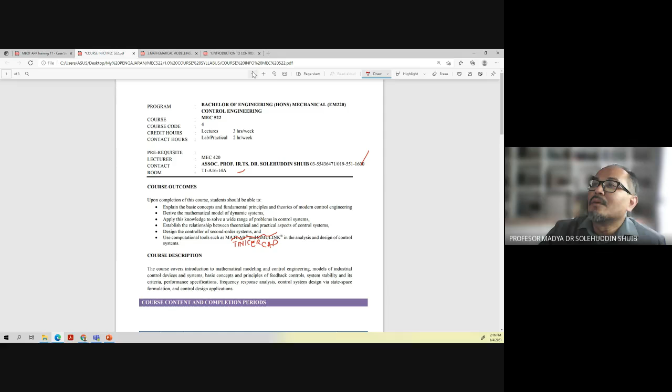As I mentioned last week, for this class we are going to explain the fundamental and basic concept of modern control engineering. You should be able to derive a mathematical model of a dynamic system, and then apply it to a wide range of problems in control systems. As for the practical aspect, which is for the lab, we're going to use a computational tool, Tinkercad, to do the analysis of the control system.

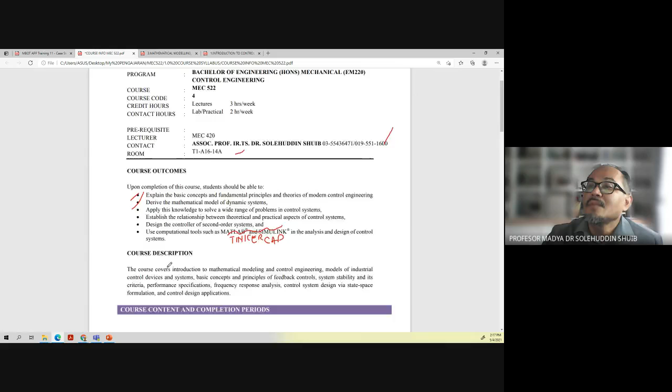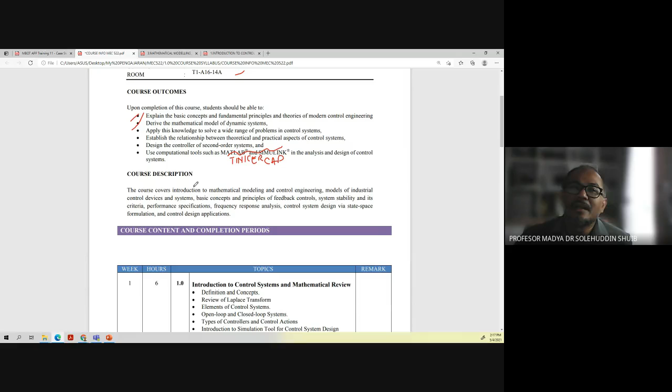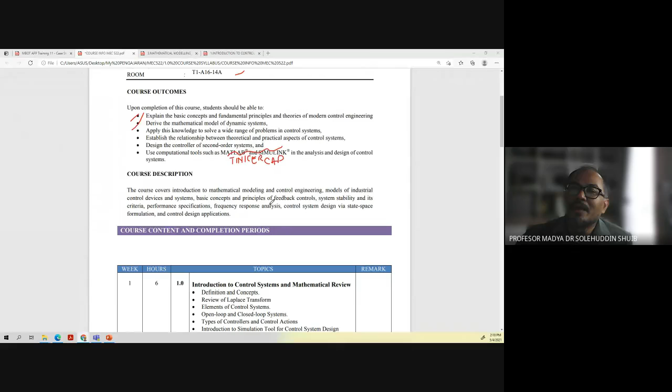For this class we are going to cover the following: introduction to mathematical modeling and control engineering, models of industrial control devices and systems. Then we will look at the basic concept and principle of feedback control, then system stability and what the criteria will be. Then we'll look at performance specification, frequency response analysis, and control design applications.

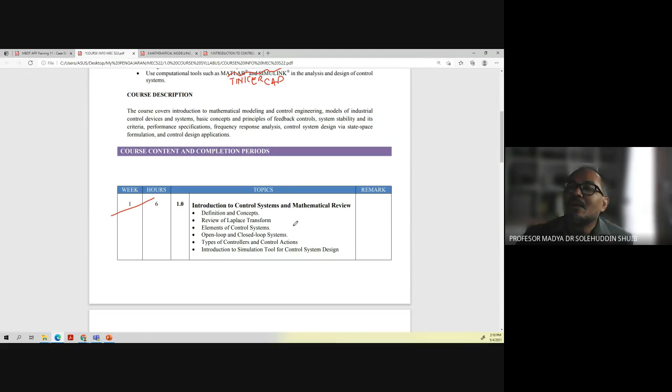So what we have done last week is a bit on the introduction and review of Laplace transform, what elements in control systems are about, open loop and closed loop systems, different types of controllers, and a bit on the introduction to simulation tools for control system design.

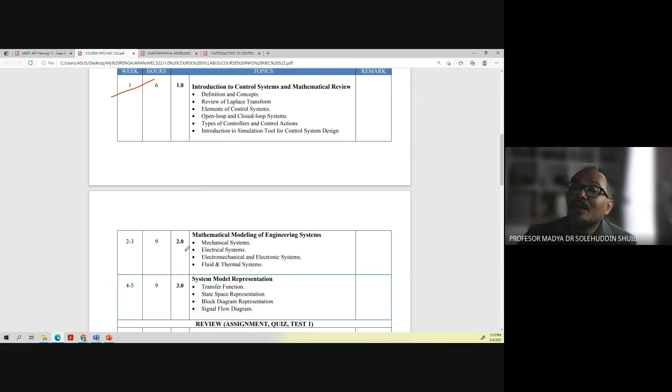So for this week, for today's lecture, I'm going to cover the aspect of mathematical modeling of engineering systems. We are going to look at the mathematical modeling for mechanical systems, then mathematical modeling for electrical systems, and then we're going to look at electromechanical and electronic systems.

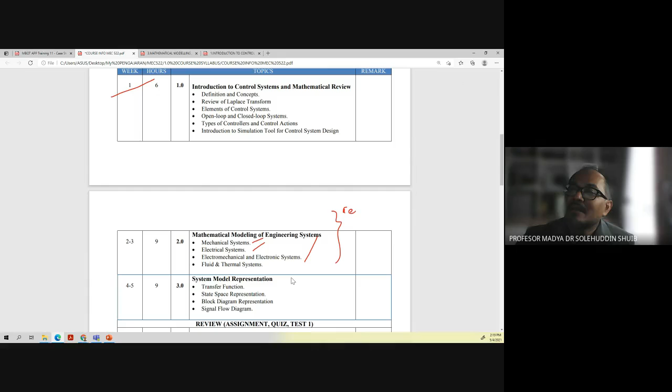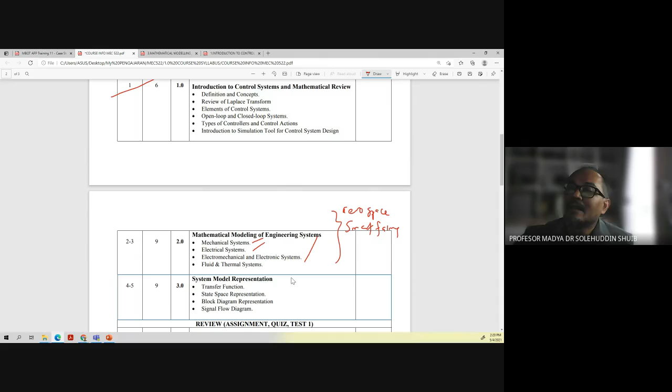During your time, I think the projection of technology that will be the national focus - first thing is more on aerospace. That one will be the national focus, and then they talk about smart farming. And then last but not least, they talk about electrical and electronic systems, which is related to the topic we are covering now. So that one would be the focus of our country and region. The jobs will be circulated among that area, and the grant funding as well.

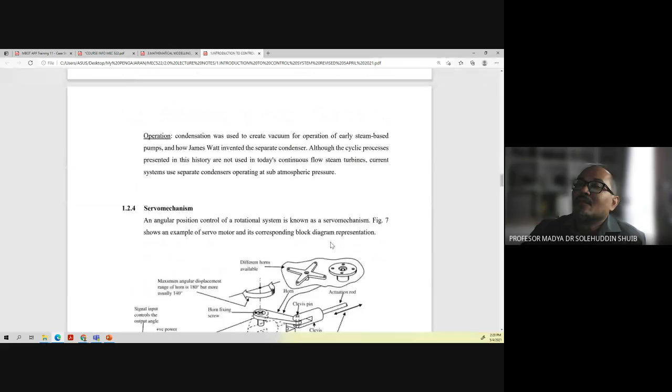So this is what we're going to do today. I'm going to recap a bit what we have done last week. This is the handout that I have given to you, but today with a bit of an update with an example of it. We look at this example.

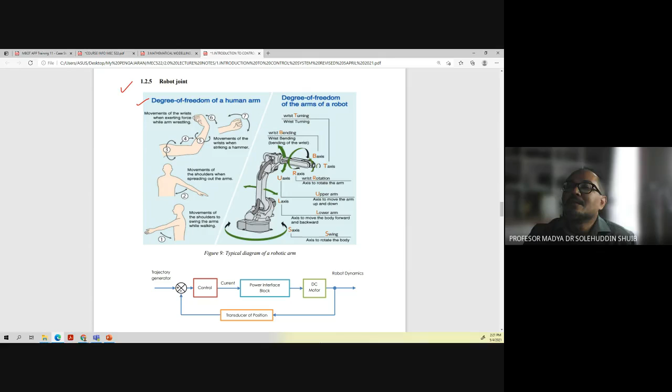You can see here, try the first one - we have the movement of the shoulder, to swing the arm while walking. While walking, your shoulder swings the arms while walking, going this way, this way.

Step number 2, you can see is the movement of the shoulder when spreading out the arm. Movement of the shoulder - you can try it. Spread the arm, and then you try on your own.

Another one is the steps, you can see 3, 4, 5, and 6. You can see the movement of the wrist when striking the hammer - number 7, you want to hold something and then strike something by using a hammer.

And then this is the movement of the wrist while exerting force while arm wrestling - a different type of movement, exertion. It can rotate this way, bend in and out, and then you can also rotate. This is what we call the degree of freedom of the human arm.

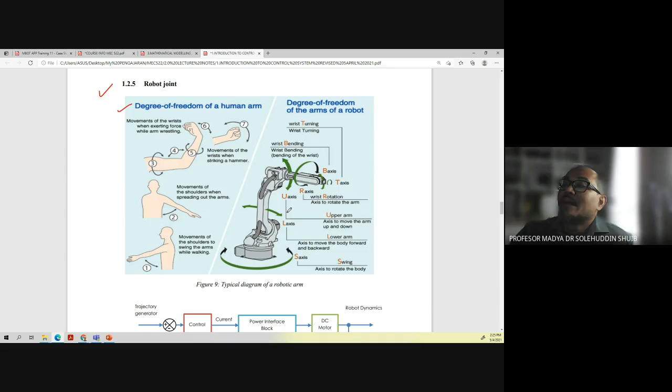L axis, we have here lower arm, the axis to move the body forward and backward. So we have the main body, then it can move the body forward or backward. So this is what we call lower L axis. And then another one we have what we call U axis, which is upper arm. L is lower arm, then the next layer is what we call upper arm.

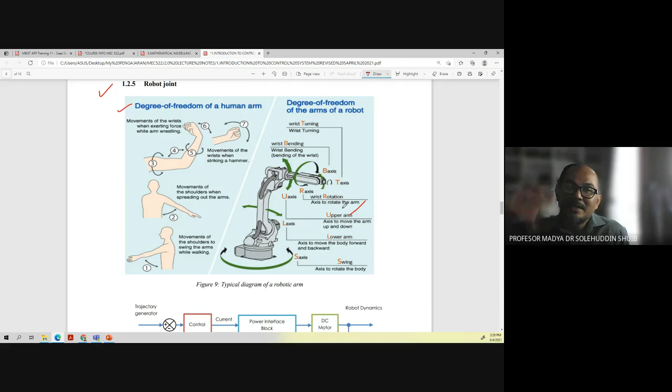So this upper arm, the role of it is the axis to move the arm up and down. And then another one we will have what we call R axis. We have S, L, U, and then R axis, which is what we call wrist, R, wrist rotation, which is to rotate the arm.

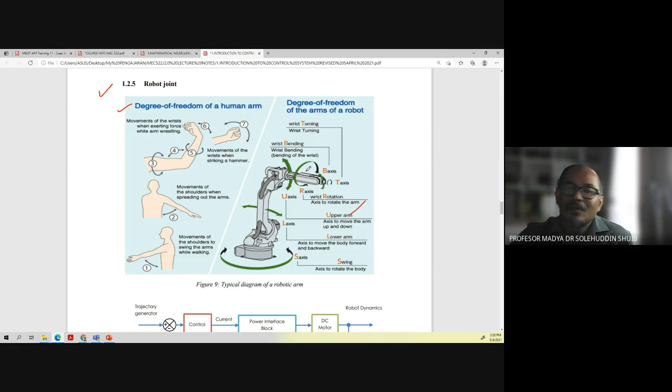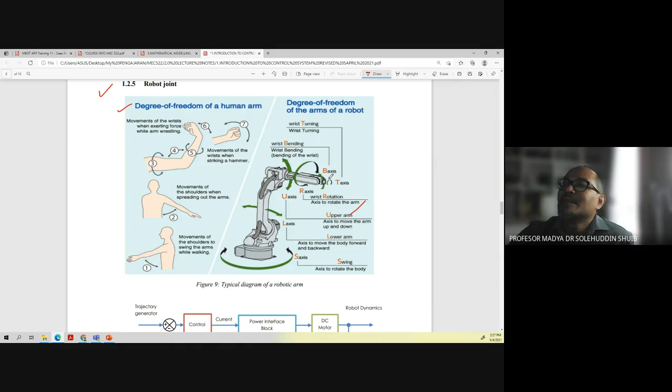That's a function of R axis. And then we have another one, what we call B axis. This is wrist bending. Bending of the wrist, B. And last but not least is T axis, which is wrist turning. So the human arm basically is complicated when we try to convert our work into the arm of the robot. Basically it's not a straightforward thing, it's complicated. So we have here S axis, L axis, U axis, R axis, B axis, then T axis. All right, and this is the block diagram of a typical robot joint.

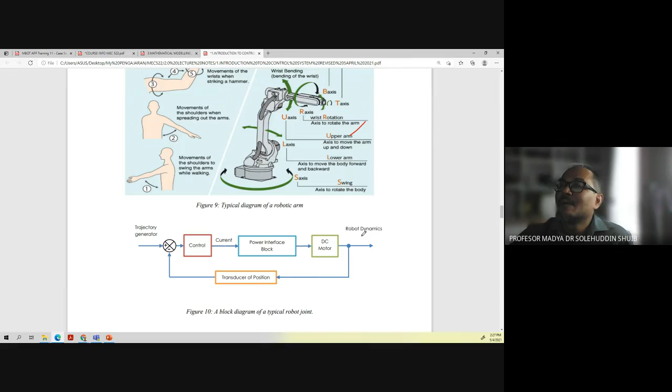We have input here, control, output current, power interface block, then DC motor, and then we have robot dynamics. And this is the feedback, going back to the transducer of the position.

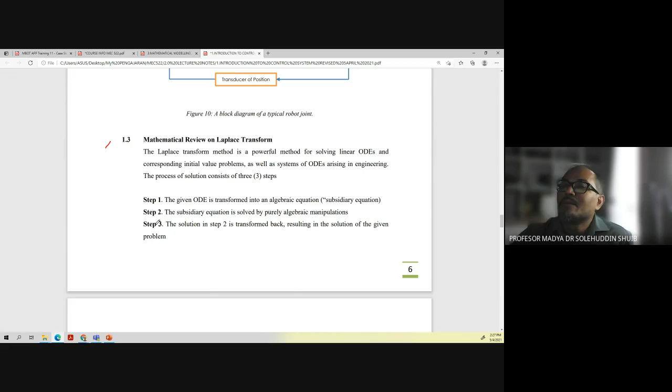Okay, this one, what we have done last time, the process of solution to get Laplace transform. Step 1, by the given ODE, ordinary differential equation. Step 2, subsidiary equation, and then the solution in step 2 we transform. So to get back the result in the solution.

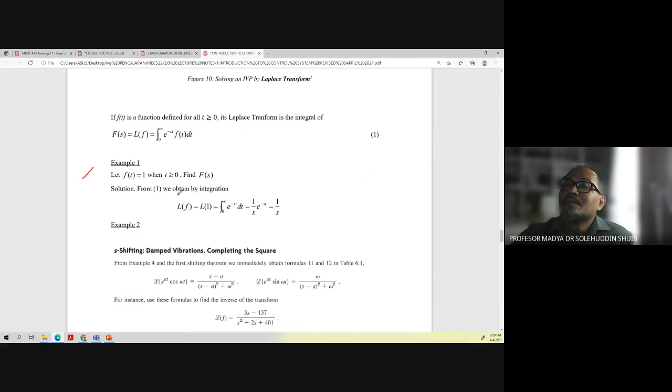So we have gone through the example, I hope you went through there on your own. Example 1, how to get the solution for example 1, and then we went through example 2 for damped vibration, and then get the solution and plot the graph.

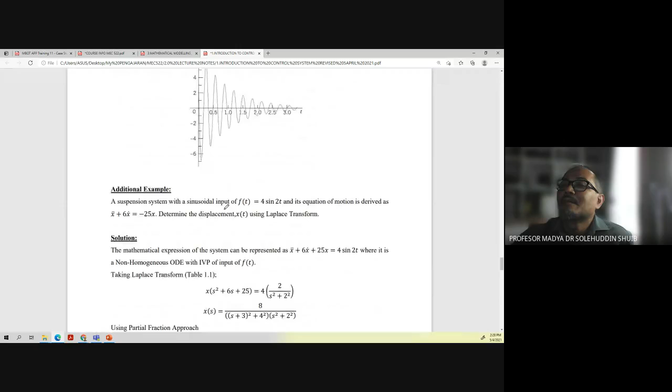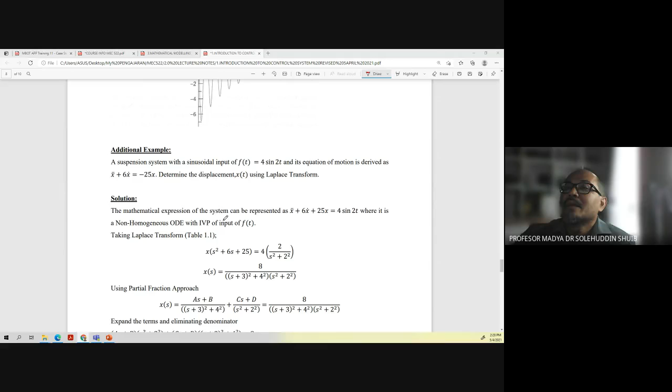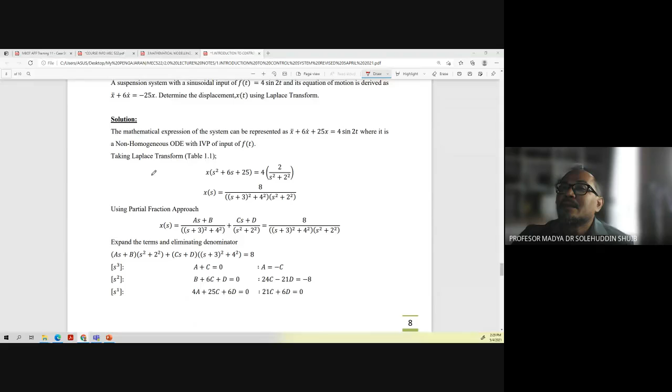And then this is an additional example for suspension system for sinusoidal input. And then we have to find the displacement using Laplace transform. I hope you can go through all of these. It's straightforward. We have shown here step by step how to use table 1.1 to obtain the value.

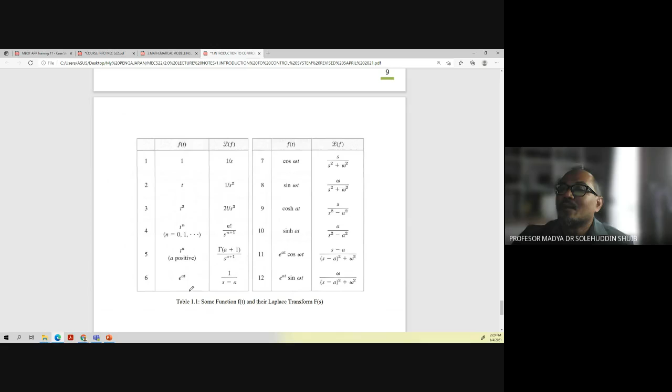All right, this is the table that I'm referring to. It has some function f(t), and then the Laplace, their Laplace transform. 1 over s, t is 1 over s square, t square is 2 factorial over s cube, and then the one related to cosine, sine, hyperbolic cosine, and the one related to exponent.

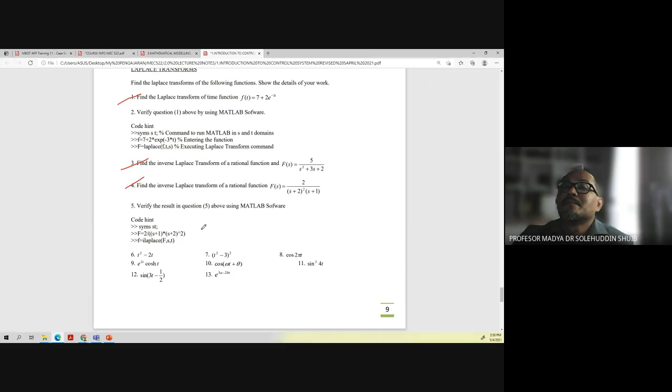So I hope you can try to do this tutorial number 1, which is the extended exercise. Find the Laplace transform, then find the inverse Laplace transform. Laplace transform for all of this, you can try on your own. This is our tutorial.

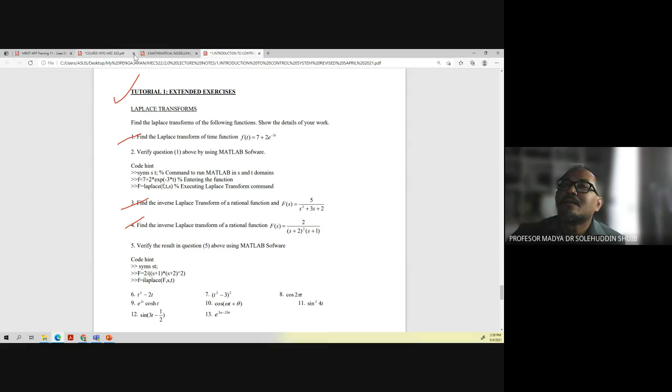Now it's 2:30, I proceed with the order of our class. My lecture, I will cover mathematical modeling, and then after that, system model representation. So we are going to do chapter 3 first, and then come back to chapter 2.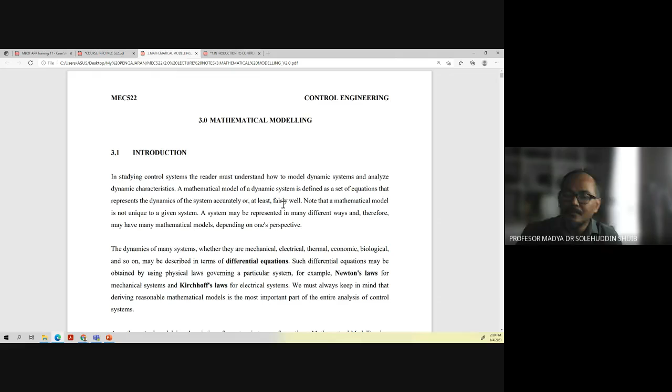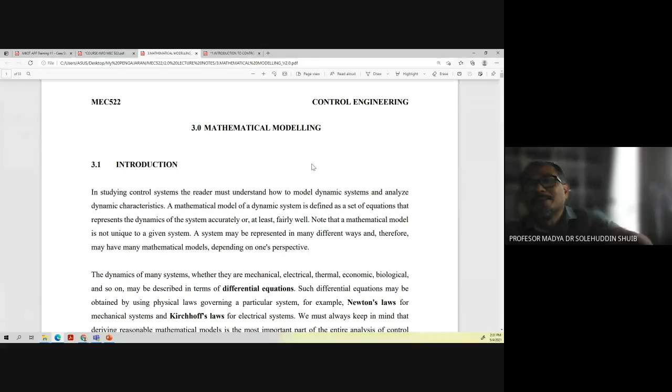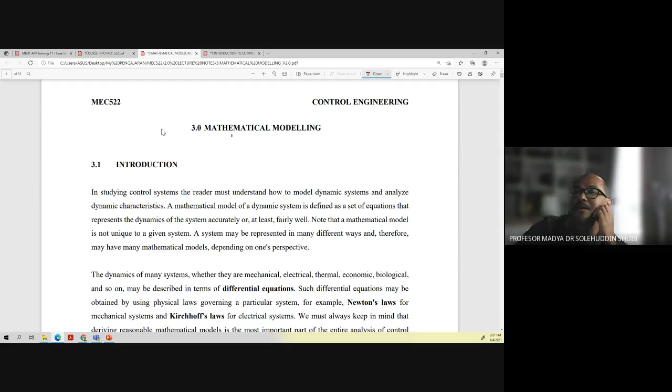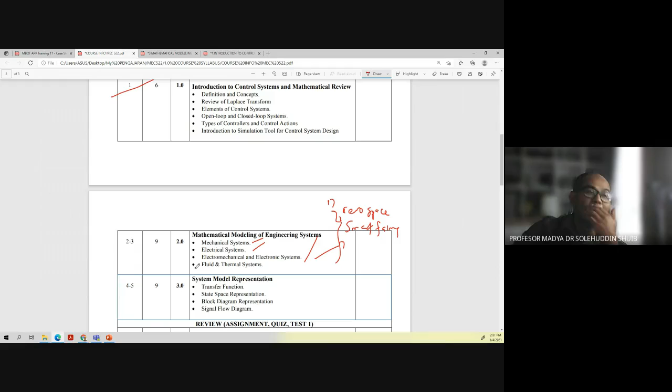Okay, we proceed to this note, which is mathematical modeling. So we are going to do mathematical modeling for mechanical system, electrical system, and then electromechanical and electronic system. For fluid and thermal system, I leave it to you to study on your own. But for our class, we are going to cover only these three.

Okay, we're going to go through this note. First thing, when we say mathematical model, what does it mean? Anybody want to respond? We would like to have a mathematical model. So as engineers, we should be able to look at the existing problem that normal people see, and then be able to simplify it and show it in terms of a mathematical model. So what does it mean by mathematical model?

Anybody want to try? So now you are in semester, which semester are you now? 6, right? 6 or 7? Semester 6. Meaning you are almost towards the end, to become an engineer.

So basically, what is mathematical model all about? Because some people are afraid when we talk about mathematics. They say that one is not my strength. So basically what mathematical model is about, being an engineer, is using mathematical concepts.

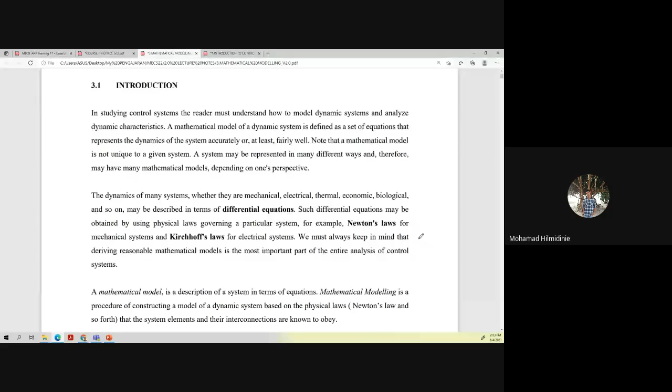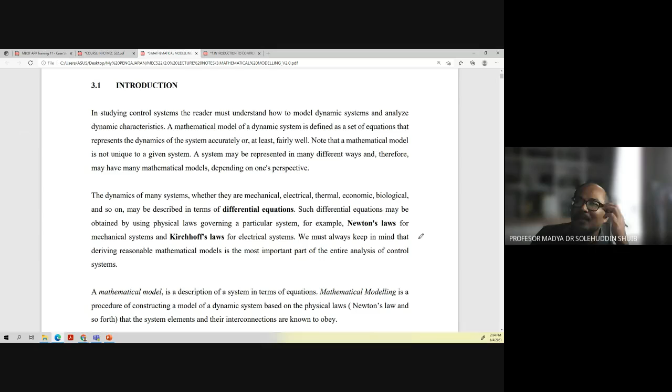Because as engineers, we apply mathematics and physics to solve engineering problems. So what we are doing now is we analyze the system. That's why in control system you must understand how to model a dynamic system and analyze the dynamic characteristics. Because the way we look at the mathematics, the equation is not the same as...

how a mathematician looks at the equation. It's not the same because it will have a physical meaning to it. That's why we cannot see the engineering problem similarly to a mathematician, and that's why you need to understand and explain the physical meaning of it.

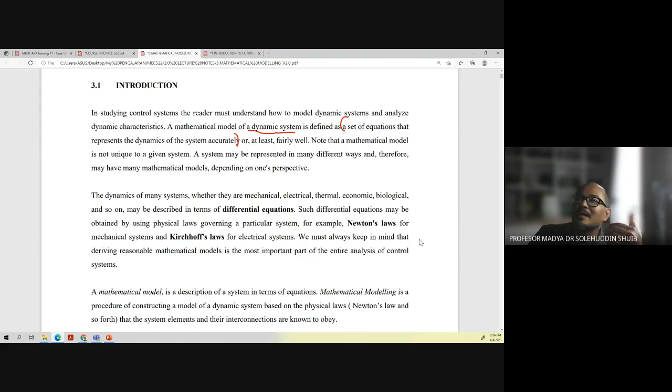So if you look here, what's mentioned is mathematical model of a dynamic system. So it's been defined here. Since we study control systems, we are talking about a dynamic system. So what is the mathematical model of a dynamic system? It is a set of equations that represent the dynamics of the system accurately, or at least very closely, so we can predict what will be the answer or the outcome.

So we can approach or obtain the answer not only by one technique, we can solve it in different ways. There are many ways the system can be represented. Therefore, we can have many mathematical models depending on one's perspective, on how you tackle them.

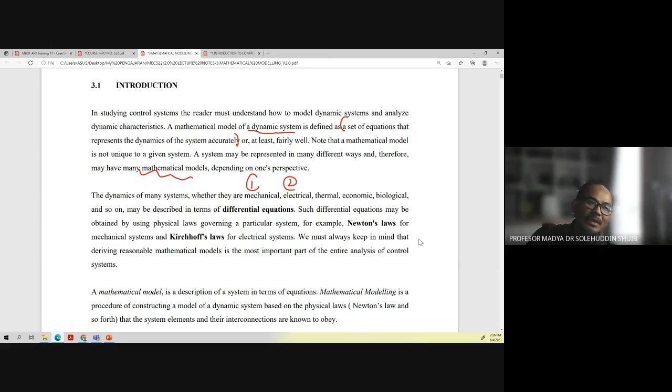So the dynamics of many systems, as I mentioned, can be mechanical, electrical, thermal, economic, biological, and so on. We can set up the model depending on the application. Even in biomedical, we can construct the mathematical model.

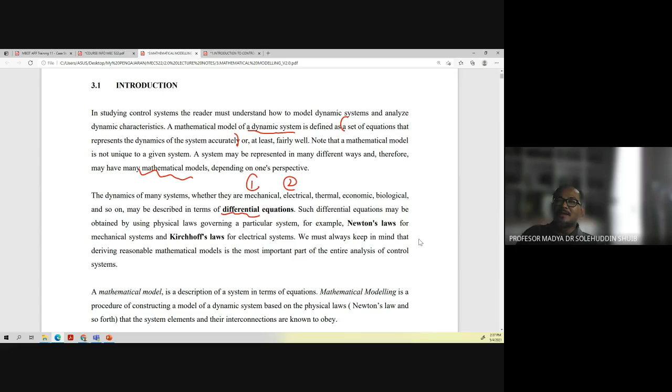It may be described in terms of what we call differential equations. That's why you learn mathematics before, ordinary differential equations (ODE). They are governed using the physical law governing that particular system.

For example, in mechanical we have Newton's law. In electrical systems we have Kirchhoff's law. So in mechanical we have Newton, in electrical we have Kirchhoff. As an engineer, you should be able to know all of this. Mechanical and electrical are related and very important to combine, especially in the area of...

Industrial IR 4.0, lots of mechanical and electrical systems work together. Even top car companies, automotive companies, these two must work together. Even M&E also work together, a mechanical consultant designing aircon, electrical system...

fire systems, and elevators. Those are very important for building services. So they work together, these consultants.

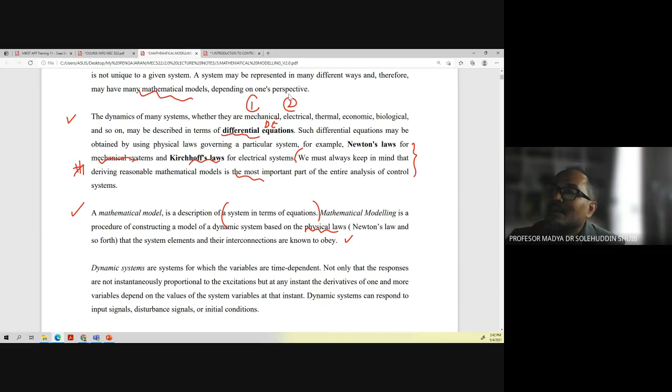That's why mathematical modeling is very important. In dynamics, you've been exposed to how to construct the equation, free body diagram, and then write down the equation of motion from there. And that is the starting point. Same thing...

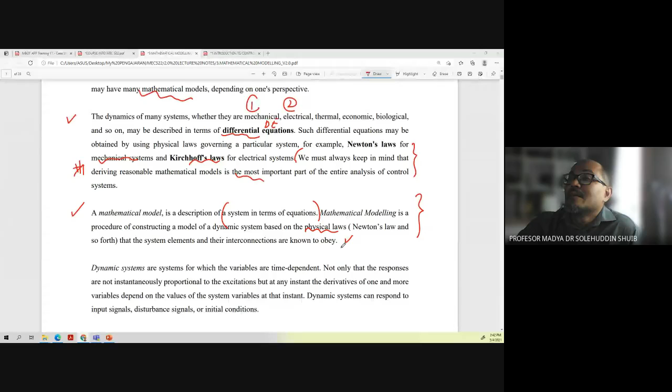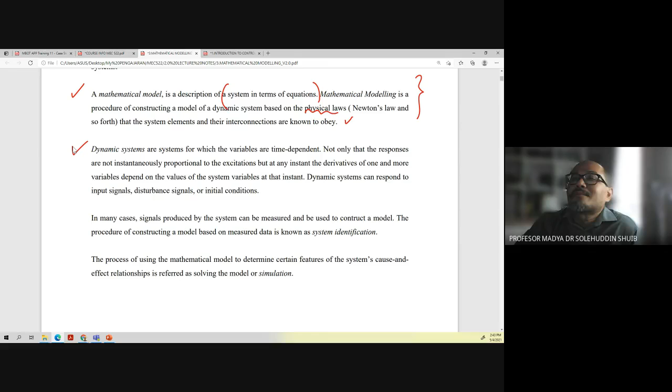Okay, next one is what we call mathematical model. I proceed to explain about dynamic system. So what is a dynamic system? System dynamic, dynamic systems. What is meant by dynamic system? We have done this one model.

Okay, anybody want to try? What does it mean by dynamic system? We have 20 students, 6 students are not coming today. Maybe they can refer to the recording. Anybody want to try?

Saiful Fazli, what is meant by dynamic system? It's not here. Okay, Hafizuddin, what? Muhammad Hafizuddin. Yes, sir. Okay, what does it mean by dynamic system?

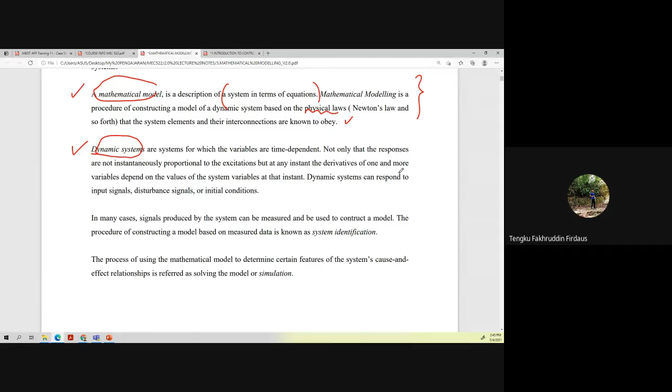Yes, betul. I think dynamic system is about a system that receives multiple signals and conditions. Multiple signals, okay.

Signal. Okay, dynamic system. Alright. Any other answer? Mana lagi ni? Tengok ramai ni. Are you here or not? Oh, Zuhairi. Muhammad Zuhairi. Muhammad Zuhairi, Zul Fazli.

So the term that I put emphasis here is the terminology that you're going to come across again and again. That's why you need to really know what this is about. Okay, so if you look here, we define as we have variables, which are time dependent.

As mentioned by one of your friends just now, this system can respond to input signal, and it can also respond to disturbance signal. Remember the diagram I mentioned last time? We have the input, we have input signal, we have disturbance. Dynamic system can also respond to initial condition.

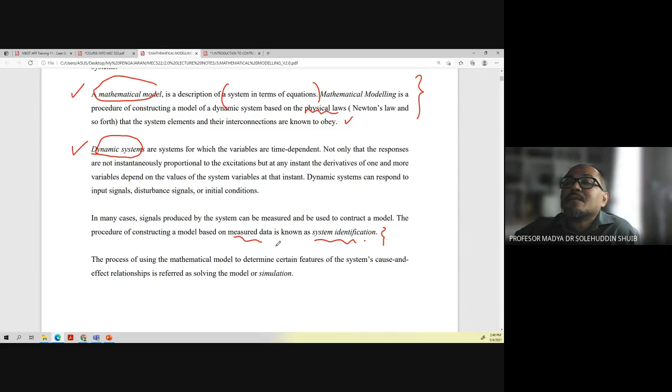So the process of using mathematical modeling to find certain features of the system, cause and effect relationship, we refer to this process as solving the model, or what we call simulation. That's why we have so many simulation software.

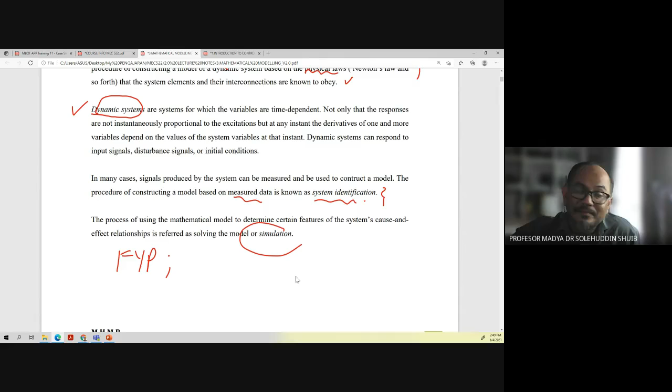When you do your final year project later on, especially right now during pandemic, we encourage students, most of the students do the simulation work. This simulation work means it doesn't mean we just have input here, output here, and don't know what happened inside. When you are using a software, this is like a black box.

That's why students should be able to explain what happened, should be able to explain what's happening inside. That's why the knowledge of mathematical modeling is very important. We require the understanding of certain problems, mechanical, electrical, if we are doing both, that's what we call simulation.

Okay, these are the steps in modeling and simulation of dynamic system. Starting with actual physical system, our interpretation based on our knowledge, what we have learned, and then experience, and then we have a mathematical representation, then we calculate the response, and then we do the performance analysis, and then we do modification.

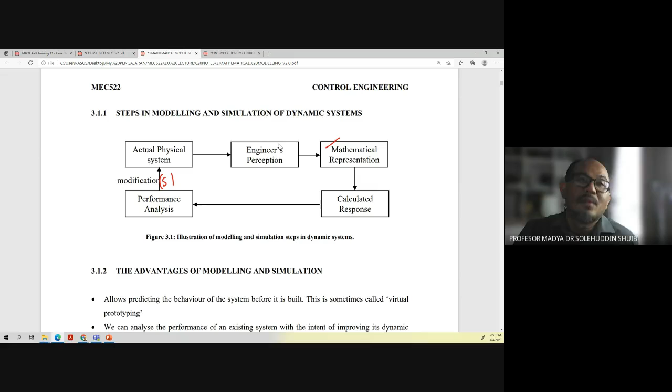So when you do the work, it cannot be first time you do it, then quickly obtain the response and find the performance and be satisfied. No, cannot. You need to have a number of iterations, a number of modifications, should have different design changes and then do it again and again.

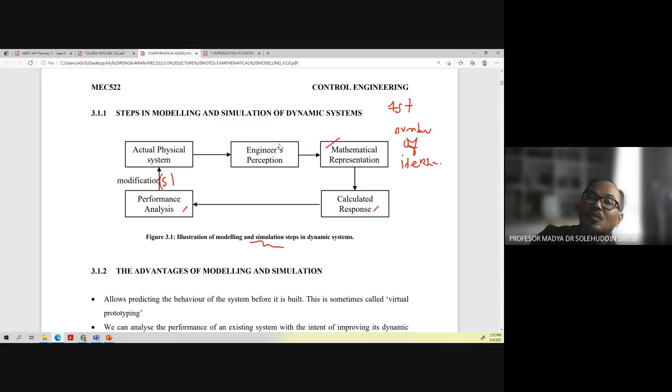But when you do simulation compared to experimental work, experiment involves a lot of money, cost to prototype and then do the testing. But when you do simulation, you can do many and try to get the optimum one. What will be the best one? And then after everybody is satisfied, team of engineers satisfied, your superior satisfied, then you can start to fabricate and do testing or proceed further.

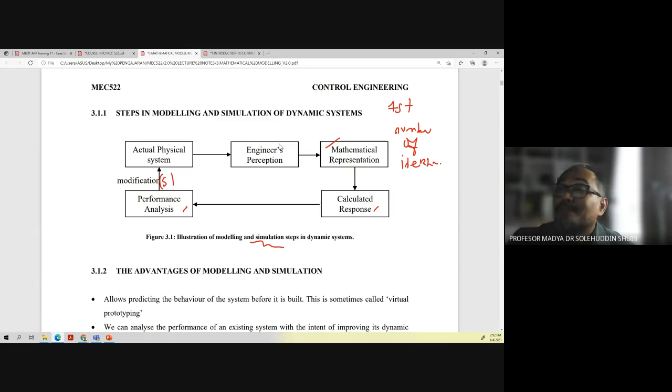That's why modeling and simulation is very important. Okay, so these are the advantages of modeling and simulation. I think I have mentioned last time, but I will say it again.

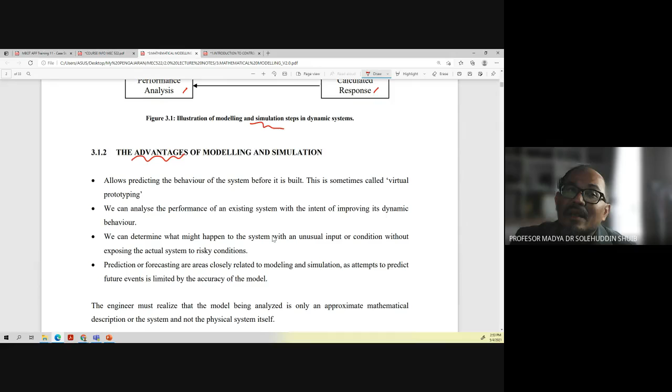Many big companies right now, as I mentioned, they move from the traditional way of doing testing to modeling and simulation, because they have a lot of advantages.

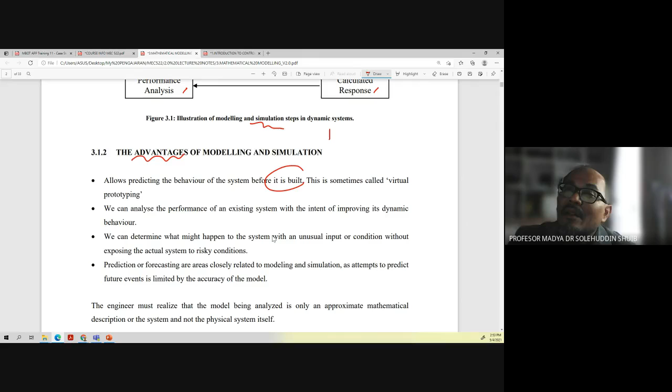We can predict the behavior of the system before it is built. So we can predict the behavior of the system. That's why we call this a virtual prototype.

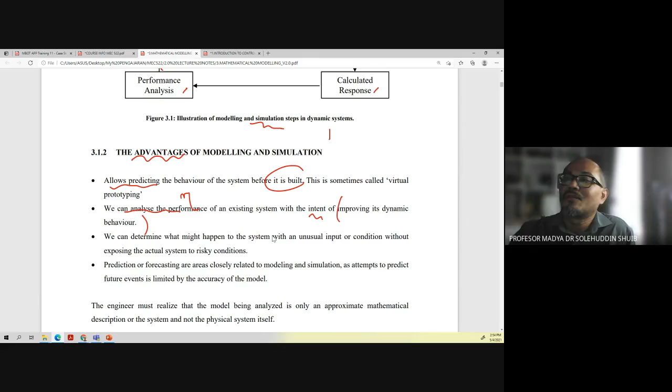Another advantage is you can analyze. First you prototype, and then you can analyze the performance of the existing system, because our intention is to improve the dynamic behavior. By analyzing the performance, we can see if it's okay or not, in comparison with other systems. So our intention is to improve the dynamic behavior.

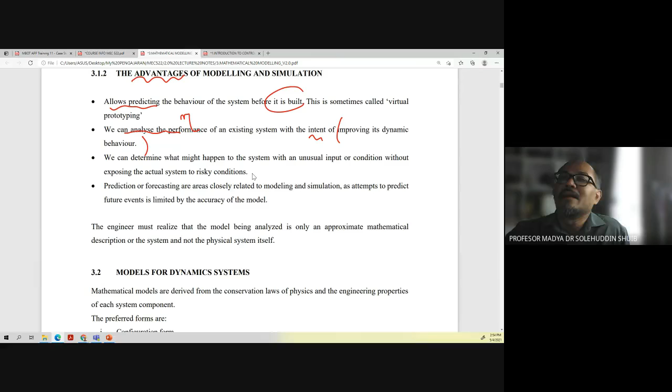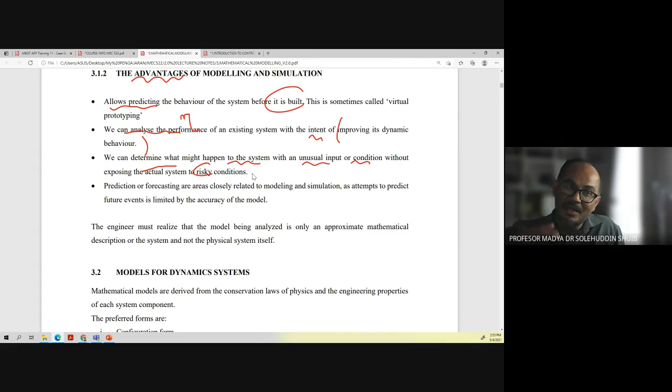Another advantage is we want to find what will happen - this is the worst case scenario. You can predict this by putting in unusual input, for example, to see what will happen to the system under the worst case scenario, with unusual input or condition, so that we can reduce the risk to the actual system - even under an unusual condition or input, what effect will it have?

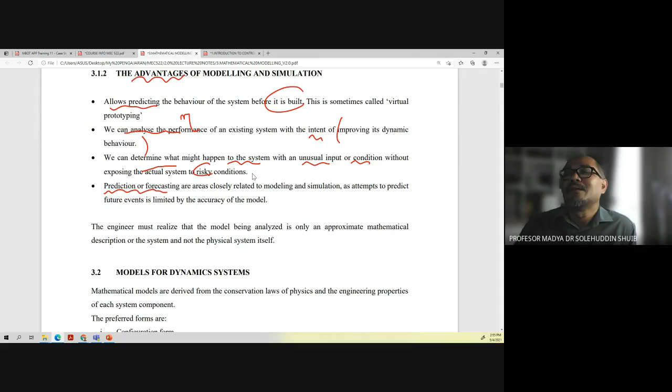Last but not least is forecasting. Forecasting here doesn't mean like a fortune teller predicting the future. No, for simulation you can do forecasting based on the data that we have, which are closely related - you can project the trend.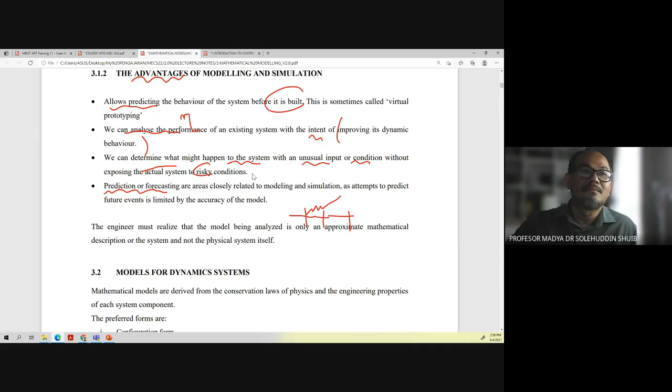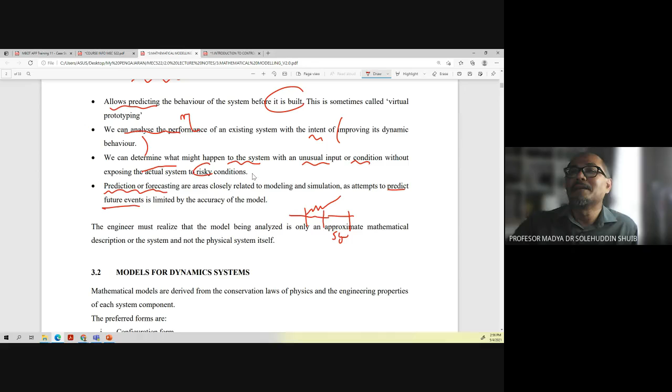For example, the trend - what will happen in 5 years time to the system? Based on the simulation and modeling that we have, we can predict the future. That's why modeling and simulation is very important.

Okay, 3.2 is a model for dynamic system. As I mentioned, the mathematical model is derived from the conservation laws of physics and engineering properties of each system component.

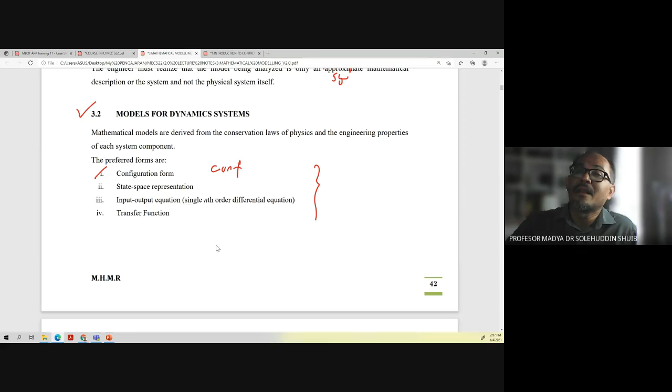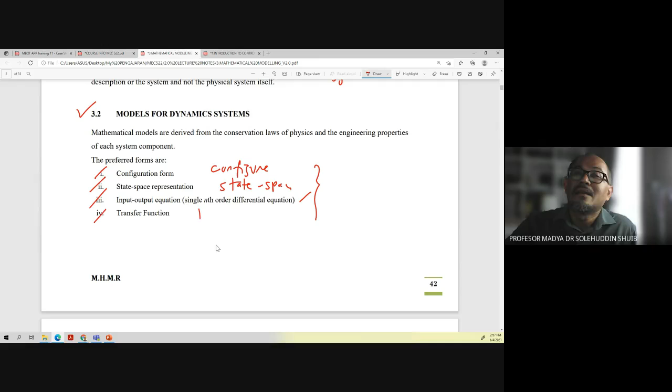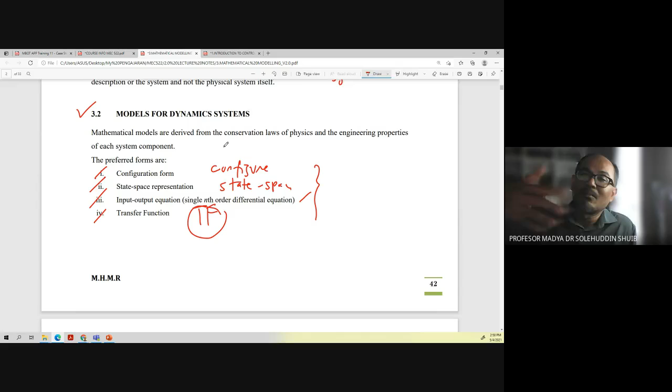So to solve this dynamic system, the form is going to be in the following forms. First is to configure the form - how to configure it. Number 2 is state space representation. Then number 3 is input output equation - that's why here we use a differential equation. Last but not least is transfer function. Once you have the transfer function, you can start to work with it. These are the preferred forms for dynamic system.

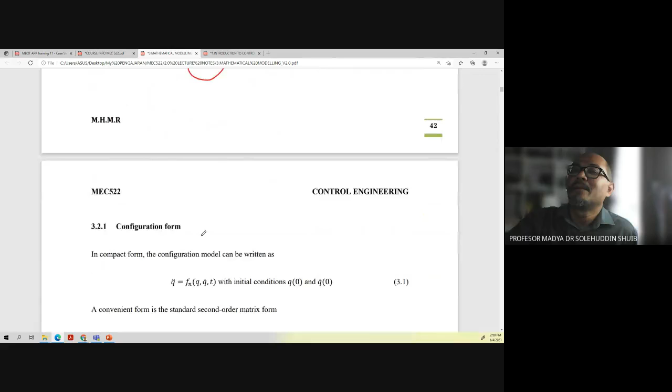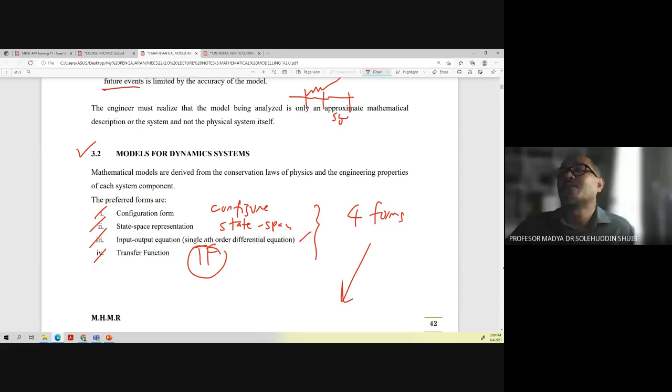We're going to look at it briefly - these 4 steps, these 4 forms. So we'll start with configuration form. For the configuration form, how do we configure it? This model we can configure it.

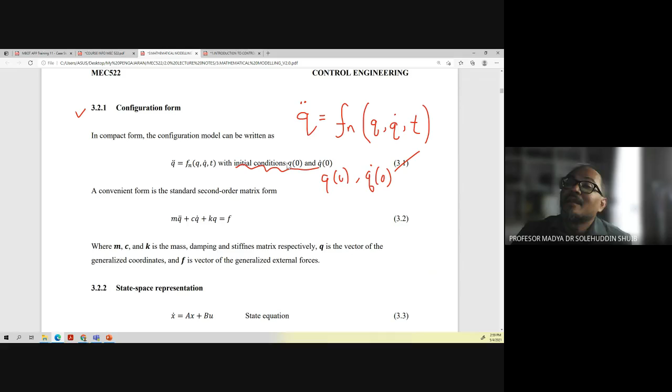We can write it as follows. In this form, you can see Q here, Q double dot, equal to a function of Q, Q dot, and T. Then you have the initial condition given as Q0 and Q dot. This is equation 3.1. I think this form is familiar - we have done this in dynamics, in vibration, in the vibration lab also. I think you will be very much familiar with it.

Convenient form - this is a standard form, standard second order matrix. You can see how we write it down and relate it with this configuration model. You can see M - this is M, referring to mass. Then Q double dot plus C, here is the damper. C is the damper, M is the mass, and K is the spring stiffness. Q here is a vector - I use Q as a vector of the generalized coordinates, while F is also a vector, but it is the generalized external forces. So Q is a vector of generalized coordinates, and F is a vector of generalized external force.

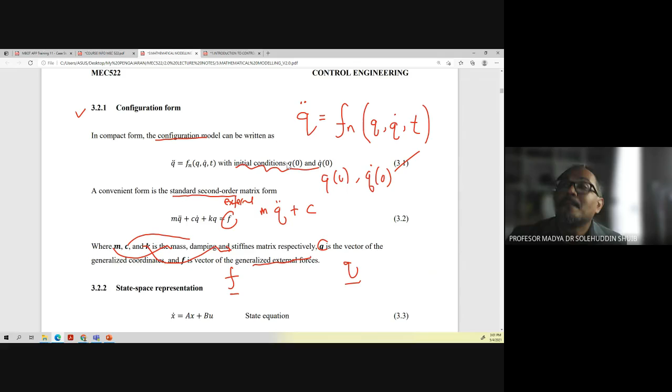This is the external force. This is what we call writing it in the configuration form. We have the function of Q dot with respect to time.

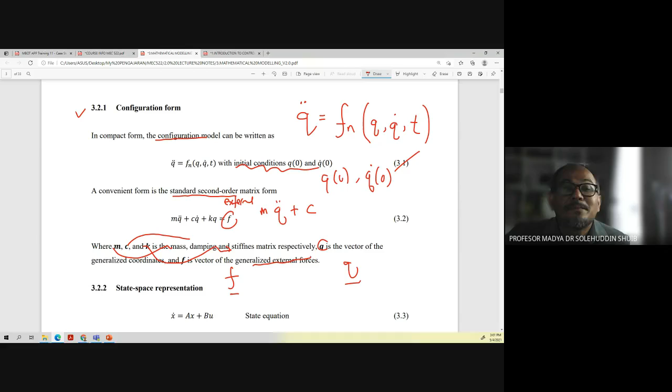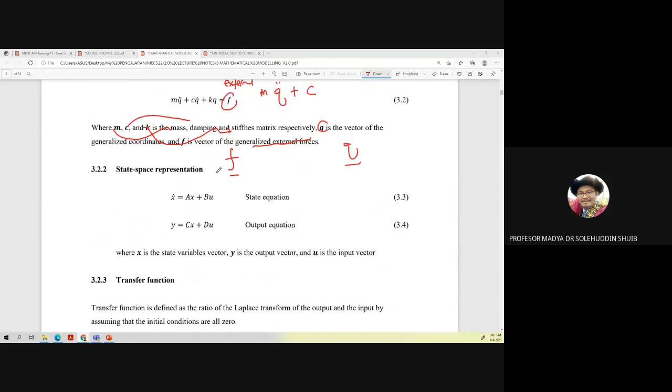Proceed after this with state space representation, transfer function.